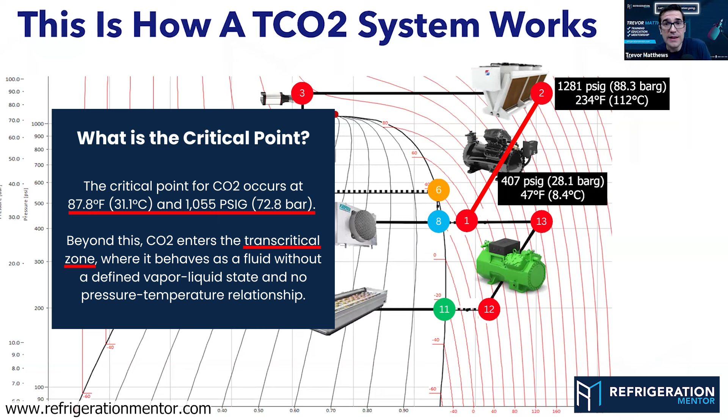Now, what does that really mean? This means there's no pressure temperature relationship and there is no vapor or liquid. This is a fluid now. It doesn't matter the compressor. It could be a Copeland, a Bitzer, a Bock, a Dorin, a Frascold, a Vilter. The list goes on. But what that compressor is doing is taking that low pressure, low temperature vapor and compressing it into a high pressure, high temperature vapor.

Then we hit something called the gas cooler. When we're above the critical point, it's a gas cooler. And what's happening inside this gas cooler? As the air goes through and we're in supercritical or transcritical mode, that CO2 turns into a fluid. It's not a vapor and it's not a liquid. And it doesn't matter the gas cooler. It could be BAC, Güntner, Ref Plus, Kelvion, Thermofin. The list goes on, but they're doing the same thing. We are dropping the temperature of the fluid. This is a sensible heat change. No pressure drop, temperature drop.

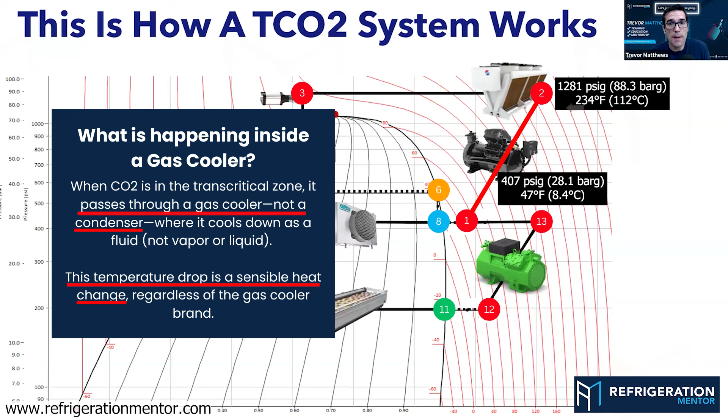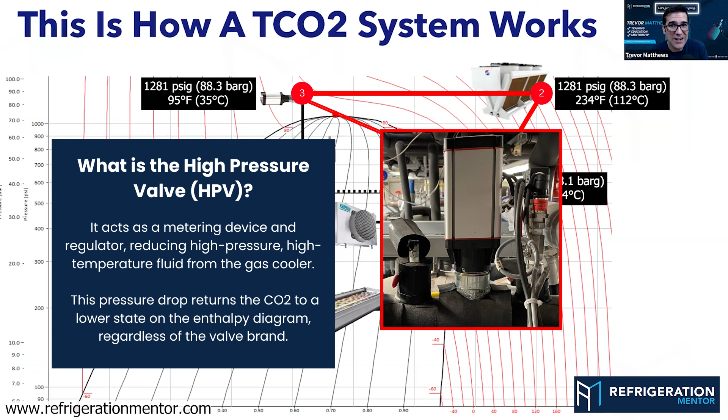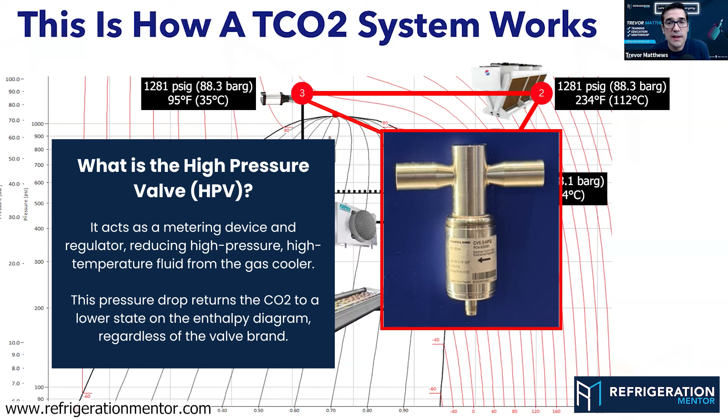Okay. When we leave that gas cooler and we're in transcritical mode, we go from point 2 to point 3, which is the high pressure valve. We are actually a fluid coming down to this high pressure valve. Once again, doesn't matter the manufacturer. It could be Danfoss, Sporlan, Carel, Copeland. The list goes on. But what is it doing? It's acting as a restriction. It's acting as a metering device.

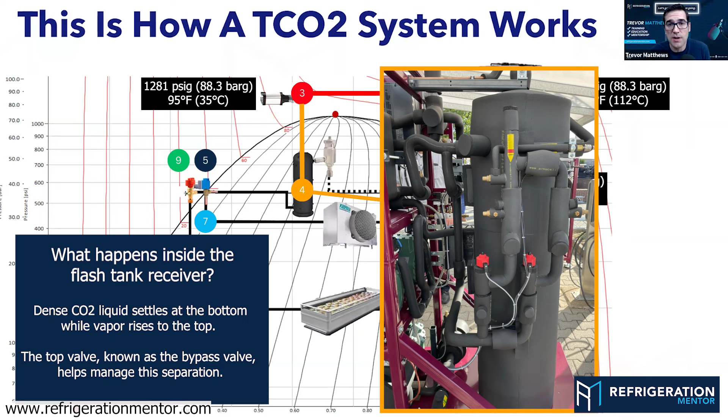It is a regulator. So all it's doing is taking that high pressure, high temperature fluid and reducing the pressure back down into the dome of the enthalpy diagram. Now it's two-phase. Now we're back into the saturated condition. It is flashing through there. So now we got a percentage of vapor and a percentage of liquid going into the receiver or the vessel. Now what happens inside this vessel, this flash tank, this receiver? Well, it separates all that dense liquid. CO2 liquid drops to the bottom and all the vapor stays to the top.

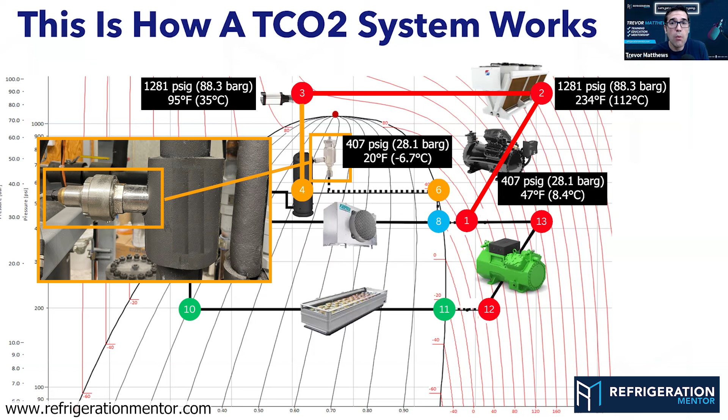The valve on the top is the bypass valve. It is the flash gas bypass valve, the vessel bypass valve or the gas bypass valve. There's many different names for it, but what is it doing? It's bypassing any of the flash gas that is disturbing the quality of that CO2 liquid. It'll open up and close and bypass gas into that medium temp compressor to make sure we have a good constant quality of pressure and temperature liquid going out to all the expansion valves in the system. So what's the next step?

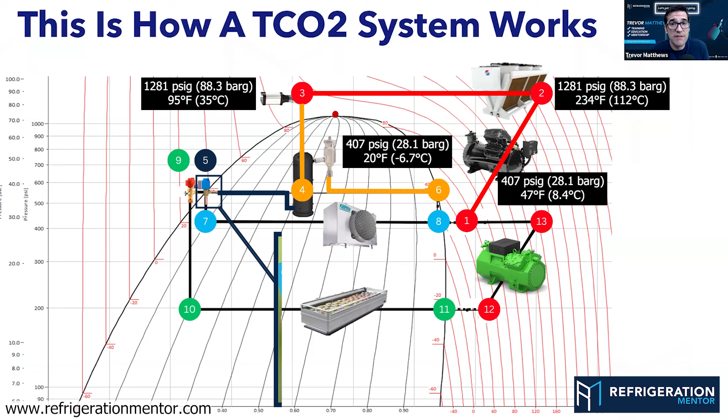We're going from that receiver to our medium temp evaporators. But first, we got to hit that expansion valve. It could be a stepper valve. It could be a pulse width modulation valve. Once again, the manufacturer doesn't matter. Danfoss, Carel, Sporlan, Emerson, and the list goes on. But what's it doing? It's doing the exact same thing. It's expanding that CO2. It's taking that medium pressure, lower temperature refrigerant and expanding it.

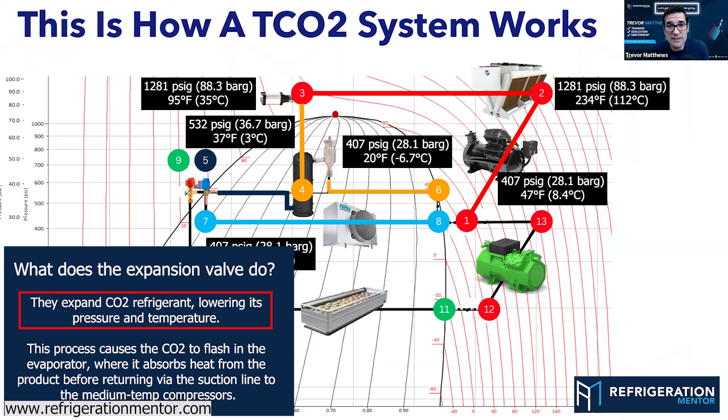So now it's flashing as it hits the distributor in the evaporator, and that evaporator is pulling the heat out of the product. As the air flies over the coil, it's boiling, sucking in that heat to take it back to that gas cooler. And how does it do it? It goes down the suction line back to the medium temp compressors.

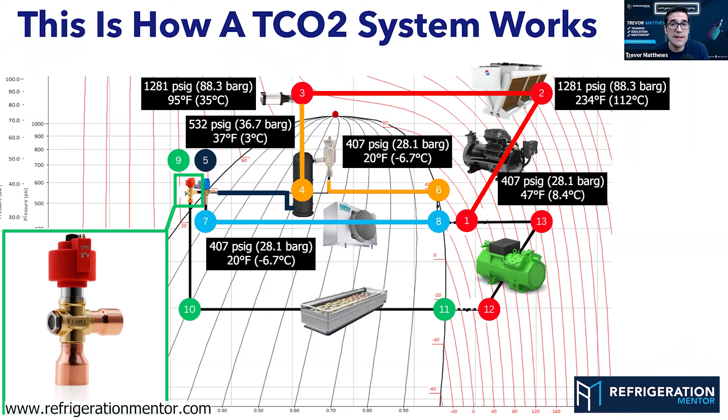Then what else is happening in that liquid line? It's also taking liquid to the low temperature expansion valves. We just need to understand that it's dropping the pressure even further, dropping the temperature even more to pull more heat out of that product, so we can absorb more heat out of the product to freeze it, and then back through the low temp suction line to your booster compressors.

These are your low temp compressors or subcritical compressors. We know what it's going to do. It's taking that low temperature, low pressure vapor and boosting it up to a higher pressure, higher temperature vapor. And that discharge from those subcritical compressors, those low temp compressors, goes back to the medium temp compressors, back to those transcritical compressors. This is how a CO2 system works.